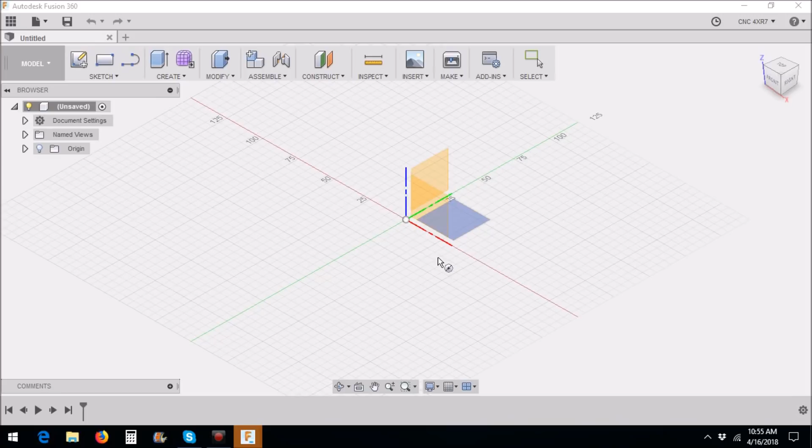So here we are in Fusion 360, and instead of handwriting the CAM for trimming these spacers back to length, I thought I'd just draw it up quickly in Fusion 360, and it'd just be much quicker. So first what I want to do is just create a cylinder. We're going to put it on this bottom surface here, and I'm going to start in the center.

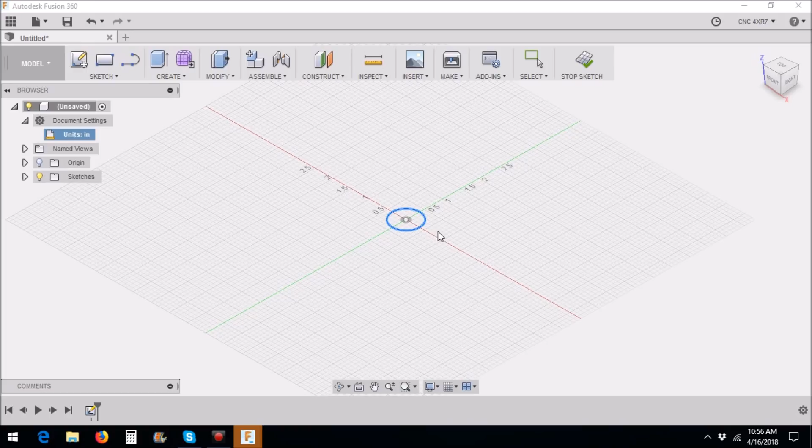Alright, I've got this set up for millimeters, so let me change my document settings here to inch. Alright, let's try that again. So we go to create cylinder. I want this bottom surface here, and the stock diameter is 0.749, and the length that I want to trim it to is 0.926.

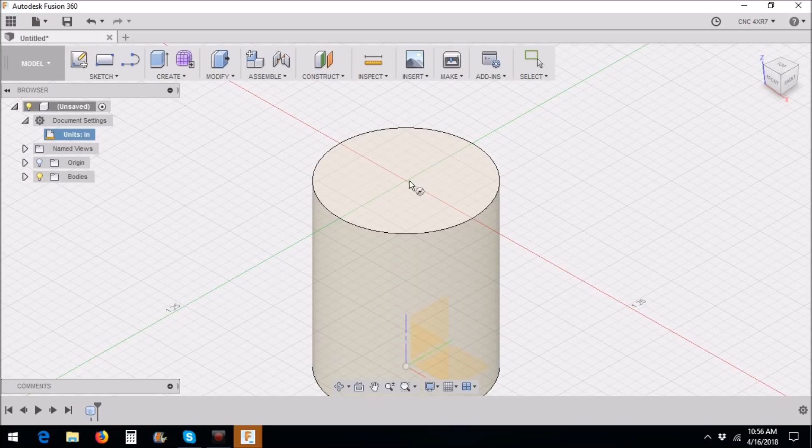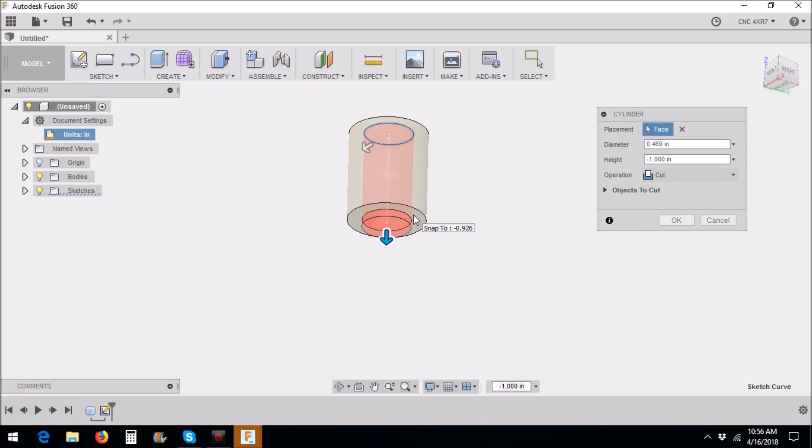Then we want to draw another cylinder here, and we want to put it on this top surface, again right in the center, and this is the inside diameter, and that is 0.469. And then we want to just drag it down to the bottom and cut through the material. If you want to get it exactly even, you can click this bottom surface.

However, it's not necessary. Okay, now the spacer had a flat on there, but I don't really need to draw that on there just to trim it to length, so I'm just going to omit that. And let's just go ahead and put our chamfer on here. So go to Modify, Chamfer, and then we'll click this outside edge here and put a slight chamfer on here.

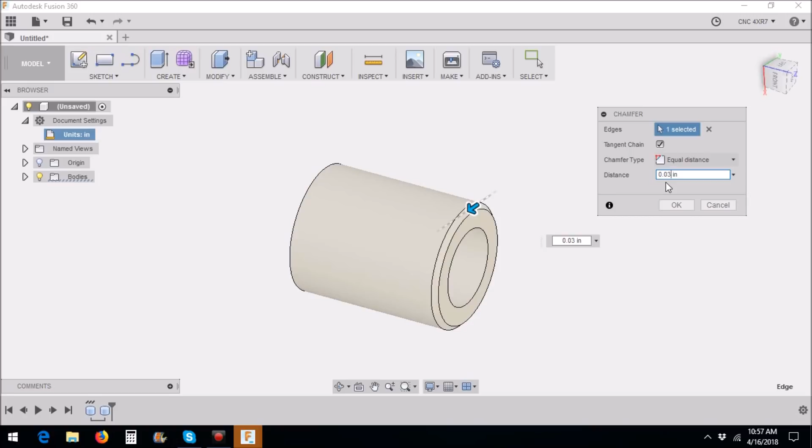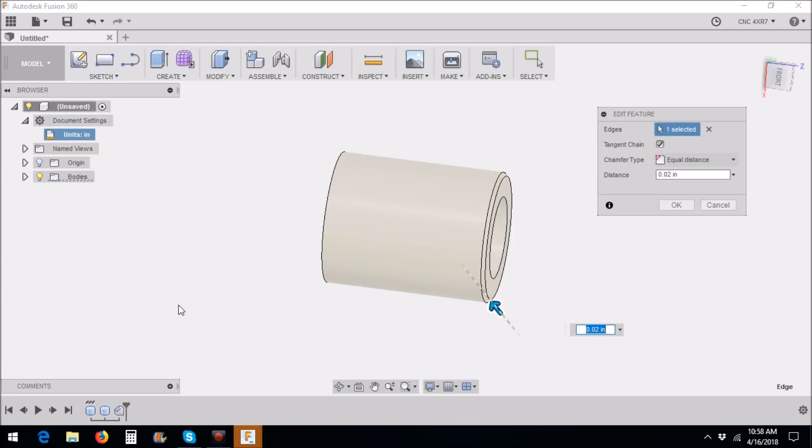Maybe let's try 50 thousandths, see what that looks like. Maybe 30 thousandths. Maybe 20. Alright, there we go. Say 20 thousandths. Now of course it has it on this side as well. It's not necessary to put it on there because I'm not really trimming that side, but we can go ahead and do that. Go back and edit the feature and hold Control and click that edge. Now it does both.

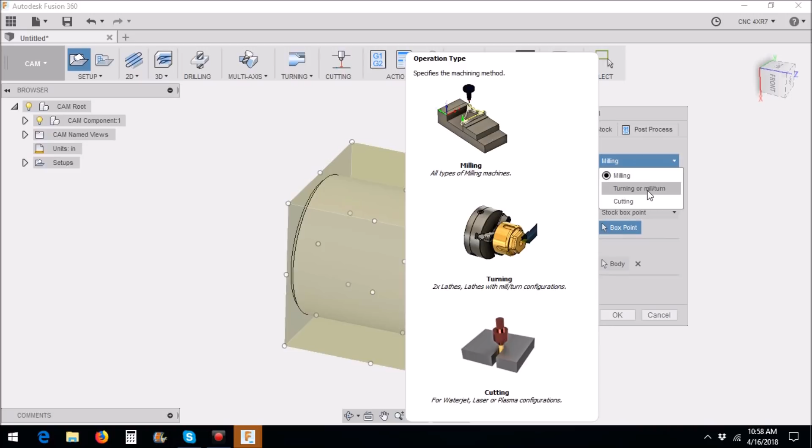Alright, so that's it for drawing. Now let's go to the CAM, and then for our setup, new setup, we're going to be doing a turning or mill turn.

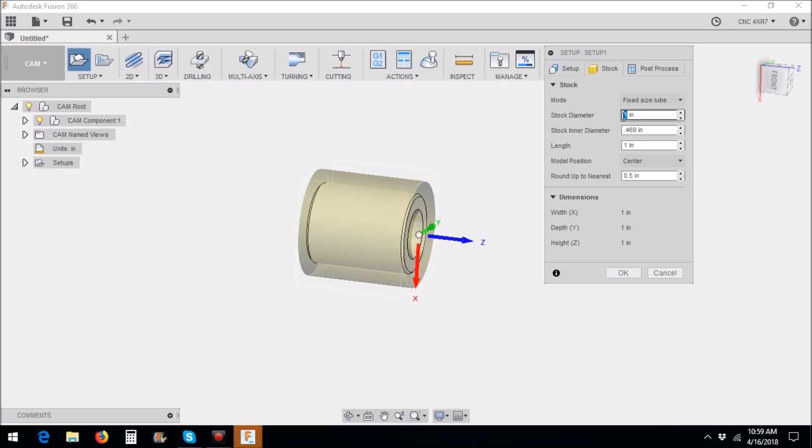We want to select spun profile, and we want to change our stock to a tube so that it has an ID. The inner diameter is 0.469 and the OD is 0.75. Okay, so it always defaults to putting the stock in the center. Let's go back and change that, because what we want to do is we want to trim.

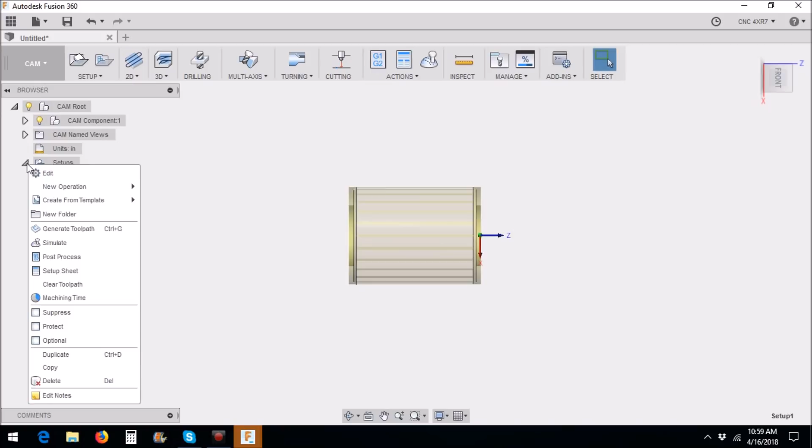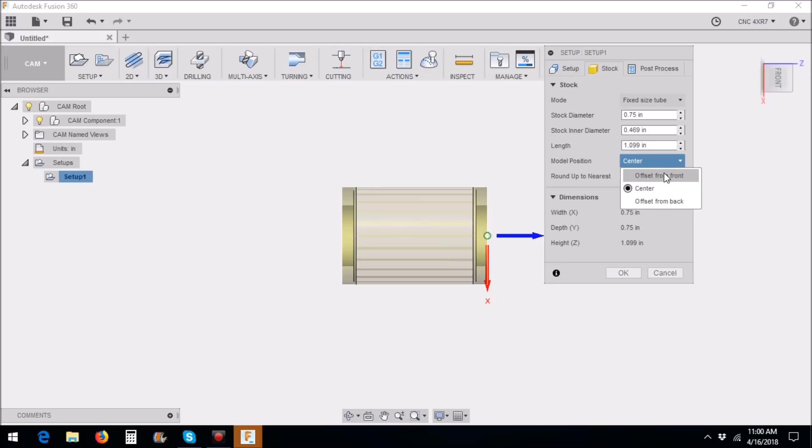Alright, come on here. Edit. Our stock length is 1.099. Whoops. Again, go back and edit. Messed that up. We want to put our model position offset from the front. How about that? There we go.

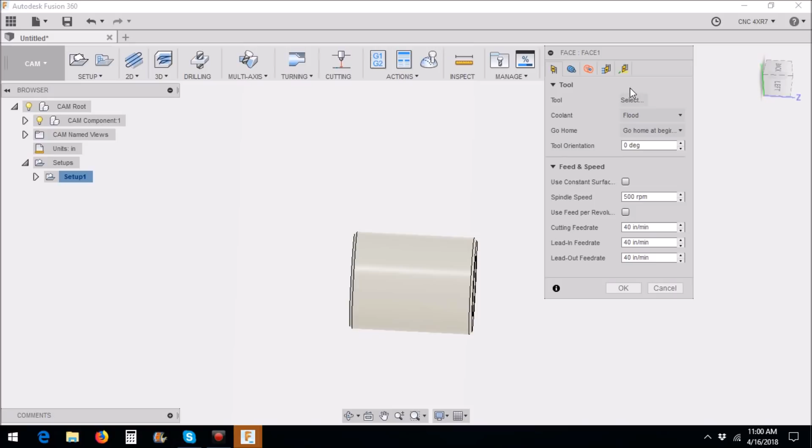So now you can see that we have all the stock in the front, and so we just want to come back and face it off until we get to the model. So we're going to do a facing operation. I'm going to be using tool number 1. My turn tool, tool number 1. Okay. Now you can see automatically it puts just one facing operation.

So first of all, I want to change my RPMs to 1200 as that's my maximum spindle speed. And our feed rate per revolution, I want to change that to 0.01. Our lead in can be 0.02 and our lead out 0.02. We're going to use feed per revolution. We're going to use constant surface speed, and we want to change this to, let's try 650.

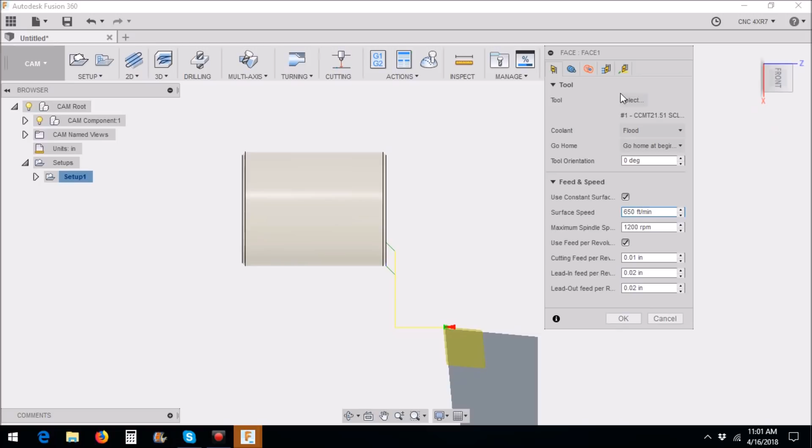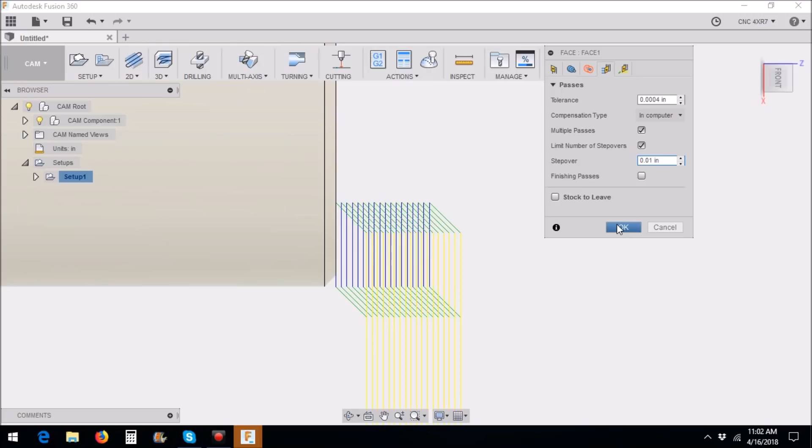That looks good. For our passes, we want to use multiple passes, and our step over needs to be 0.01. I probably can go 0.02, but let's just leave it at 0.01 for right now. I don't do a lot of steel turning or milling, so I'm not really up on my feeds and speeds for steel, so let's just leave it at 0.01. Alright, so that should be good.

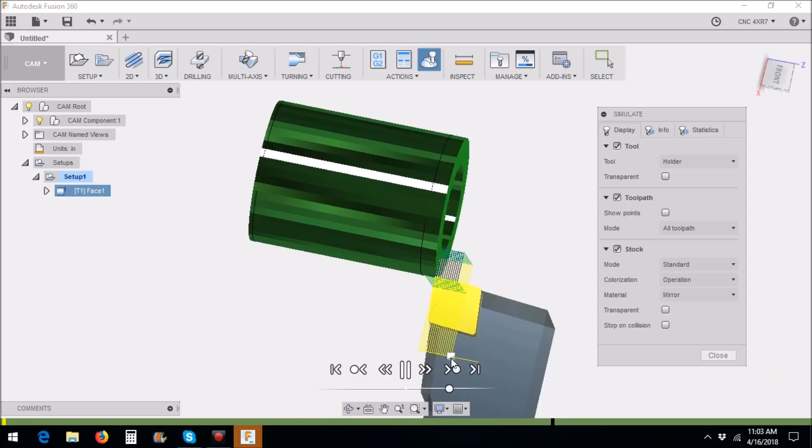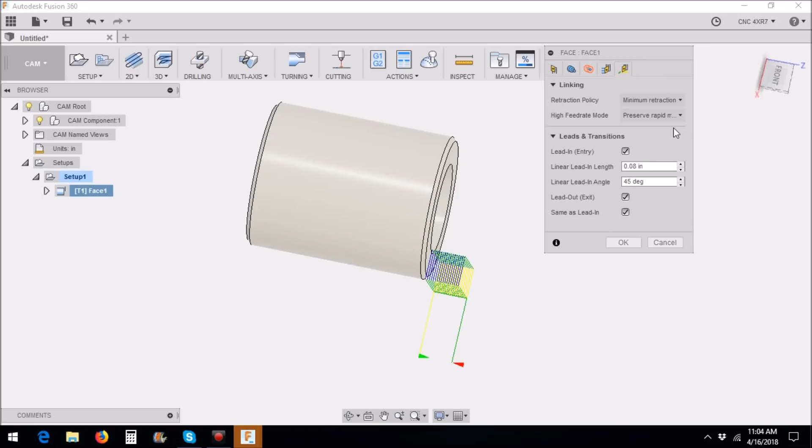And if we go and simulate this, we can see what we're going to have going on. Now you see after each pass it goes all the way back to the start. I don't necessarily need it to do that, so we can go back and fix that. Okay. Retraction policy, how about minimum retraction? We'll change that. There we go. Now you can see that it just comes back to the bare minimum. There we go.

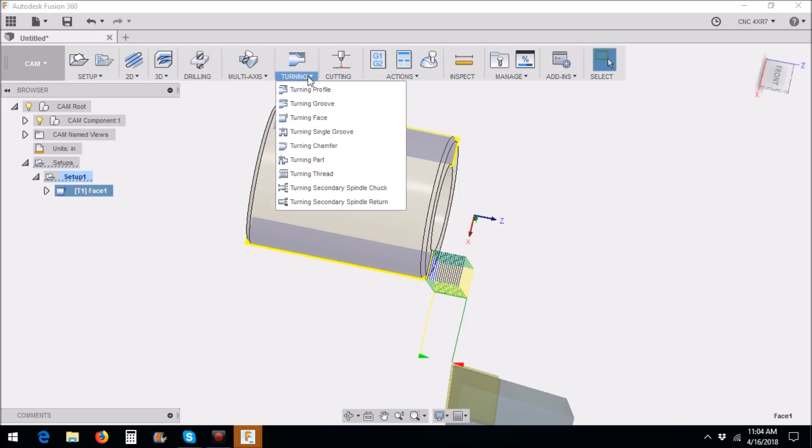Alright, so we still didn't get the chamfer here, so we need to add one more operation, a profile, and tool 1 again is fine. Surface speed is fine. Max speed is 1200. Ooh. Too many zeros. Alright. Feed's good there.

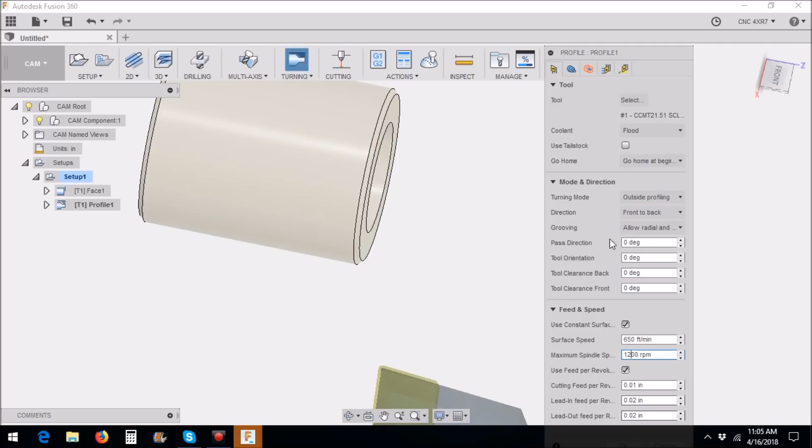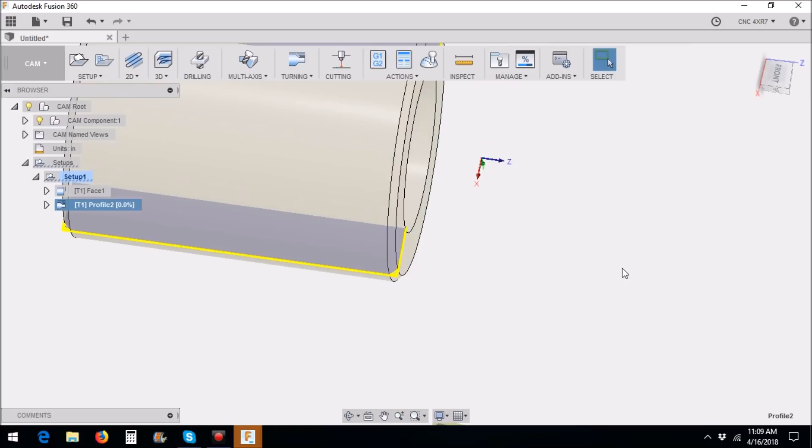Geometry. We want to select selection here, and we want to just hit this surface. Rest machining. That should be okay. Let's see if that knocks that corner off. Alright, that should be good. So let's just take a look at the whole thing real quick. Let's do our simulation.

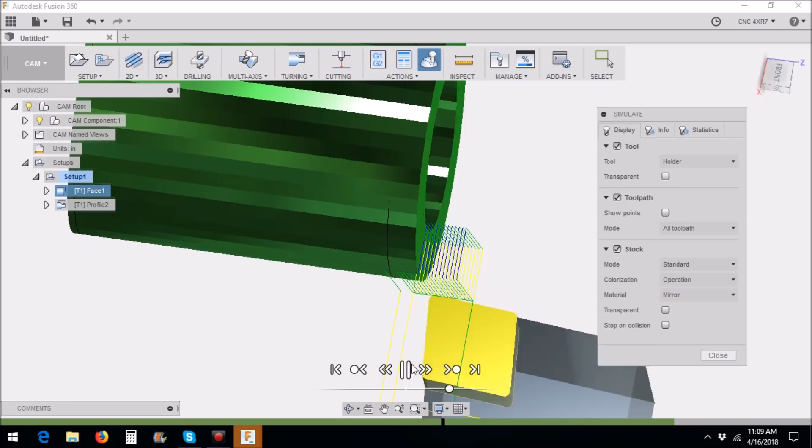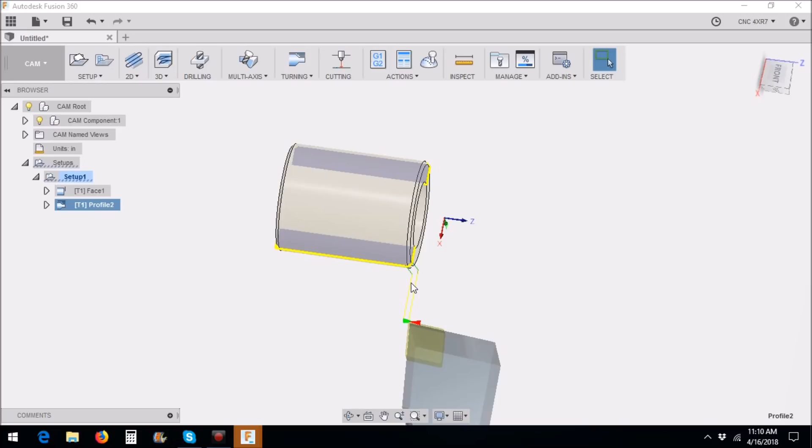Alright, so you can see, pretty easy. We're going to just do a facing operation and then come back and just knock this corner off the edge here. So that's pretty quick. Now we can go out to the lathe and let's trim all these spacers up.

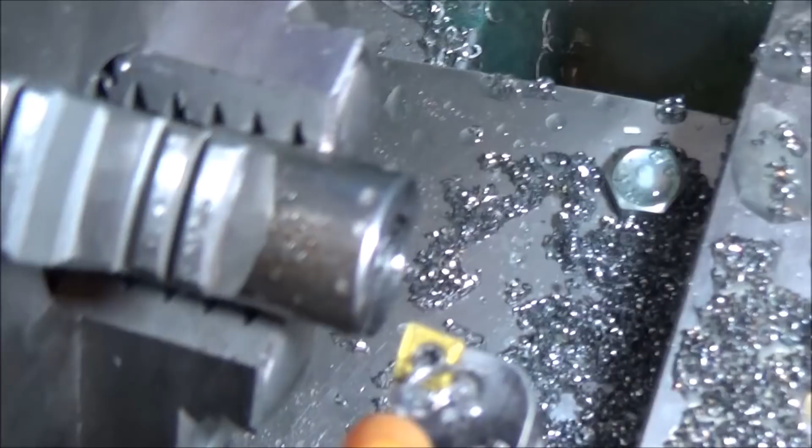Okay, well you see we got it trimmed down, and then I've moved the tool back to the 0 position so I can slide in another stock and bump it up against the tool. Put the chamfer back on there that I had originally, and should be good to go. Alright, and there you go.

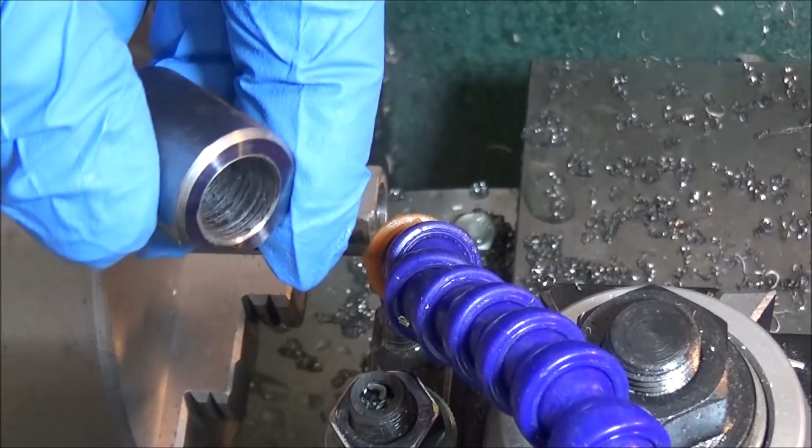Turned out pretty good. I'm sure he'll be happy with this, and he can get back to installing the brake caliper kit. So you're not the only one. I too feel your frustrations with customer no service.